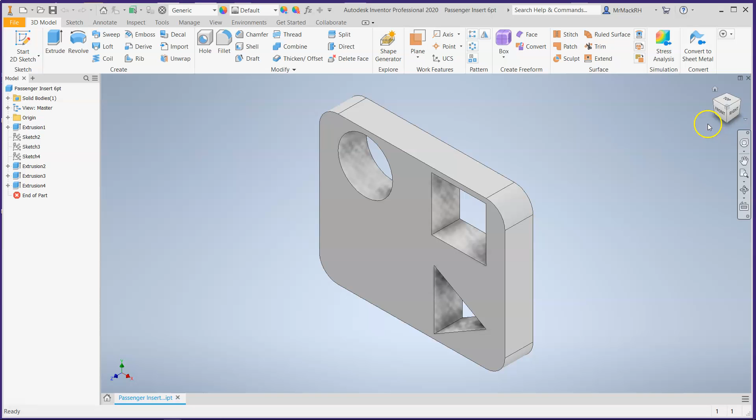So for the star shape on the passenger insert, probably the easiest thing to do is ignore the 5-point star that they have in the diagram and just create a 6-point star. That's probably the easiest. So we're going to put a new sketch and then draw our 6-point star down here. Now the easiest way to draw that 6-point star is to use two triangles.

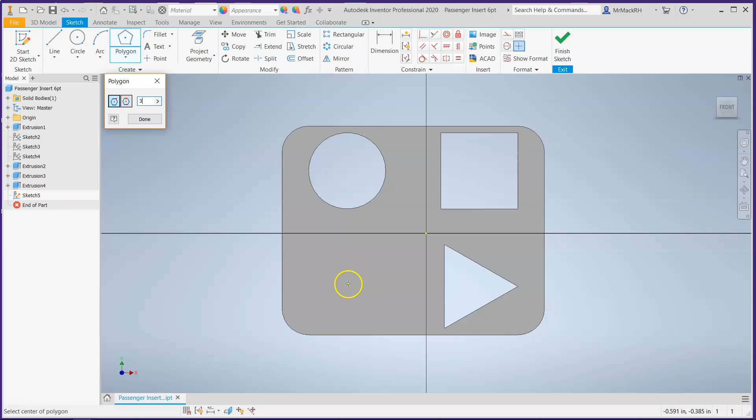So since we already have the polygon tool, set it at 3. And then we're going to find sort of the center point. This is going to be a little tricky. I can line it up in a minute. So I'll do one triangle here.

And remember, this time I'm going to use a horizontal constraint for the bottom and make it rotate horizontally like that. Then I'm going to escape, and I'm going to grab the middle of my triangle and slide it around a little bit to get in the middle of the part here. I don't want it this big, but I do want it a little bit bigger.

So we're going to dimension this side here. I'm going to go ahead and call it 0.5. That should be a good size.

And now I'm actually going to create another triangle. Click the polygon tool, should already be set at 3. I'm going to use the exact same center point, and see how I'm creating another triangle in exactly the same space, but this time I'm actually going to go to here and rotate it.

All right, now in order to make sure it's the same size, I'm going to use the equal sign, and I'm going to say that this side is equal to this side. And now it has moved it around a little bit. They're now equal. And because I'm using the same center point, here, I'll double check one thing.

I know I have this one set as horizontal. I'm going to make this one set as horizontal just to make sure it's perfectly symmetric. And it is. Hit escape again, and now let's slide it up just a little bit and over just a little bit by grabbing the center point.

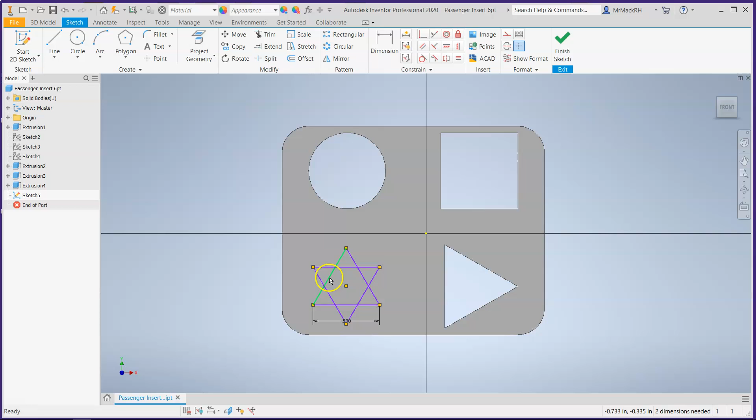So before we cut it out, though, if I tried to extrude cut this right now, it would come in pieces. So what I want to do is remove the middle lines here. So we look at the tools under Modify, and we find the Trim tool.

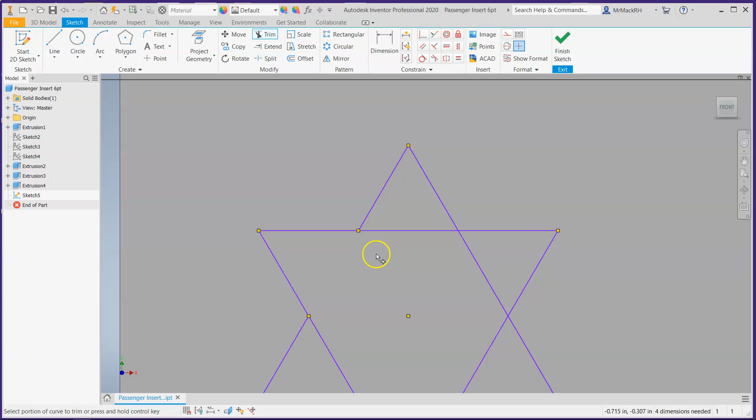So click on the Trim tool, and you'll have to zoom in close. You see how if I hover over this line, it's all green at first, and then I can tell very faintly that there's a dotted line here. That dotted line is the piece that I'm going to cut out. So I'm going to click here, here, and so on and so forth.

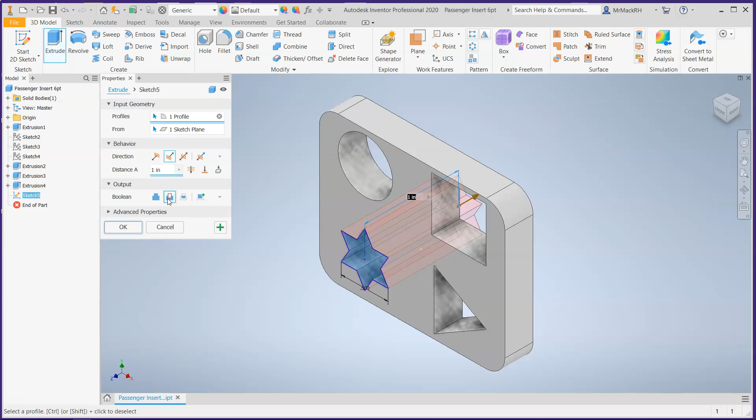And that is our 6-pointed star. So now I can finish sketch, extrude, and now reverse it to a cut. Click OK. And that is the 6-point star that you could use as a shape.

Now I'm going to go ahead and finish out with this video, and then I'll go back and make another video for a 5-point star, which is a little more complicated, but it can be kind of cool.

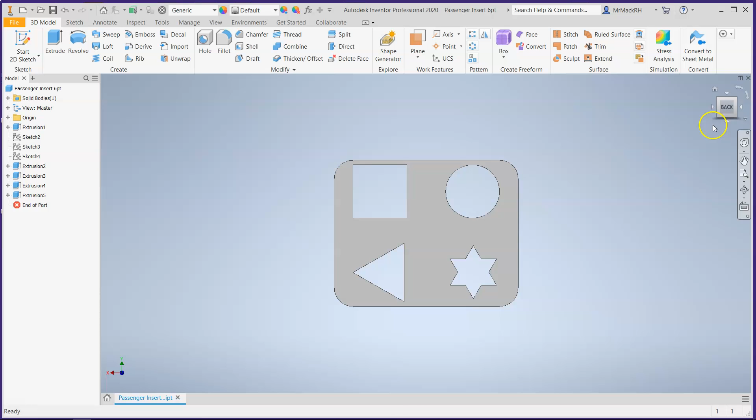So to finish this out, right now I'm looking at the front. I'm going to flip it around to the back. So what we need to understand is this piece is actually hollow. And that's what shell is. So we're going to do a shell thickness of 0.01.

I'm going to angle it back again so you can kind of see where we are. Let's do that right there. So if we look at it, here is the isometric view of the front. This is the front face. I'm going to rotate it one corner. This is the back face.

So now I'm going to use the shell tool. I look up here under Create, and then under Modify, here is the shell tool. Click on Shell. It's going to ask you some questions. First of all, do you want to remove the face that we're shelling? Yes, we do. And then what is our thickness going to be? It should be 0.01.

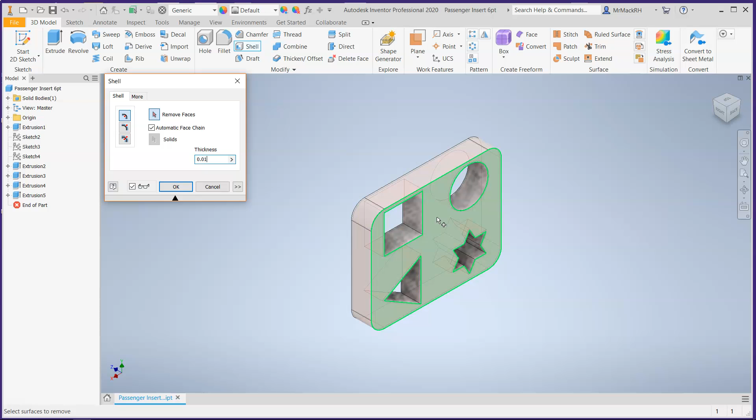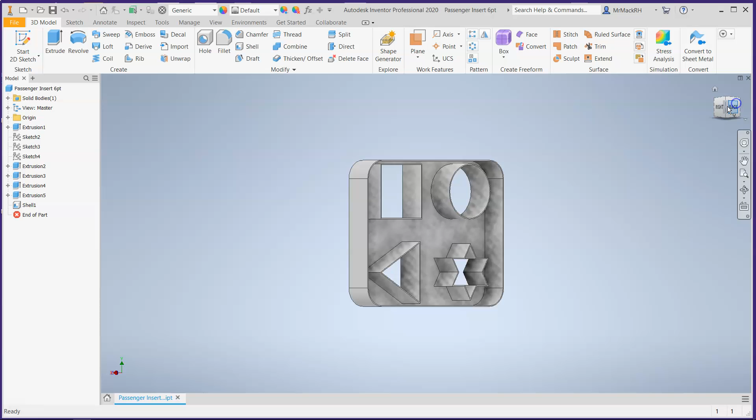And then we're going to click on the back face. Then click OK. So let's look and analyze what's happened. I had a part that looked solid, except for the cutouts. Now, upon further inspection, I have it hollowed out.

So you see what that's done? That's hollowed it out into a tray. That is called a shell.

So what does that do in the real world? Well, that saves a lot of money in plastic. So if this is being glued down anyway, does it really matter if it's a solid piece of plastic? No. So you shell it out. That saves money on plastic. It saves time on the manufacturing process. So it's something useful and convenient.

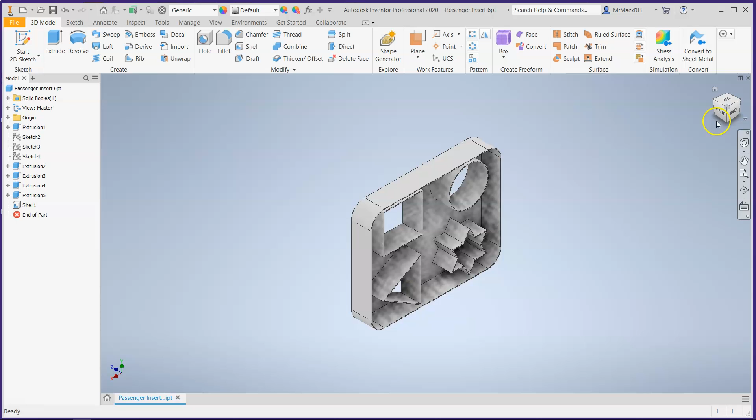You do this with sheet metal a lot. Now, you don't necessarily extrude cut the same way you do with sheet metal, but it is part of the design. So that's called a shell.

And finally, we're going to change the color. Up here at the top, well, first thing we want to do is we want to select the name of the part. I've named it Passenger Insert 6-point. So once I select the name, you'll notice it's been highlighted blue.

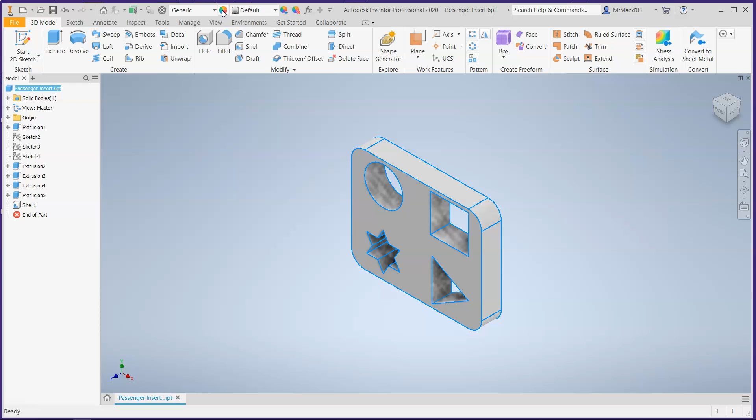Now there's some color wheels at the top. The middle color wheel. Click there. You have to double click. All right, there it is.

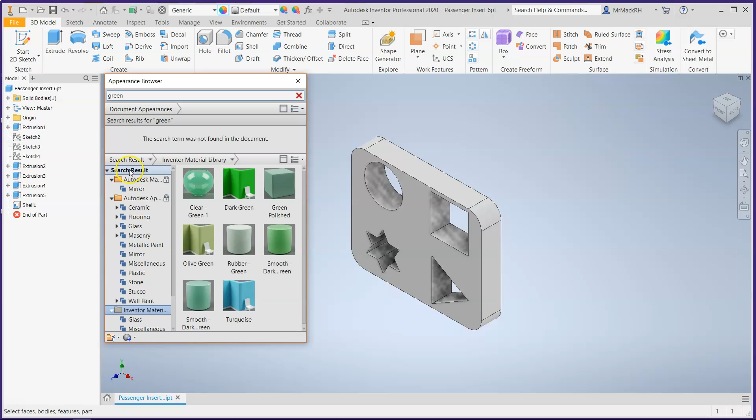So, what color do we want? We're going to search. I'm going to make it green because that's what it is in the diagram. And then it says you're looking currently in Inventor materials. So I want to make sure I'm looking in all the folders, not just the materials folder. So maybe, let's see, is there a way to search all? Yeah, so if you click on search result, then it's going to give you every green that has been labeled.

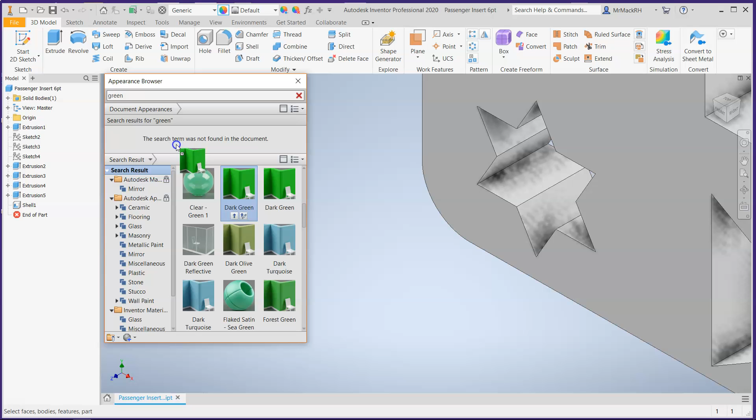Inside Inventor altogether. And basically it's this green here, the dark green as they call it, although that's pretty bright. That's the one that I think they have in the diagram or the picture. So grab that one, that picture, and drag it here where it says the search term is not found. Drag it here. And so if we select our part name, then click on our color, and it has now been applied. And now you can X out.

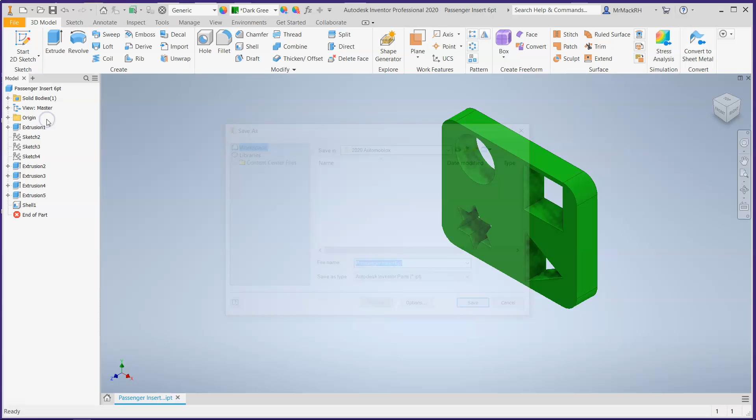Save what we have. File. Save as if you haven't named it yet. Passenger Insert 6-point or Passenger Insert and then your initials. That's fine. And then click Save. Yes, replace it. And that is it for the Passenger Insert.

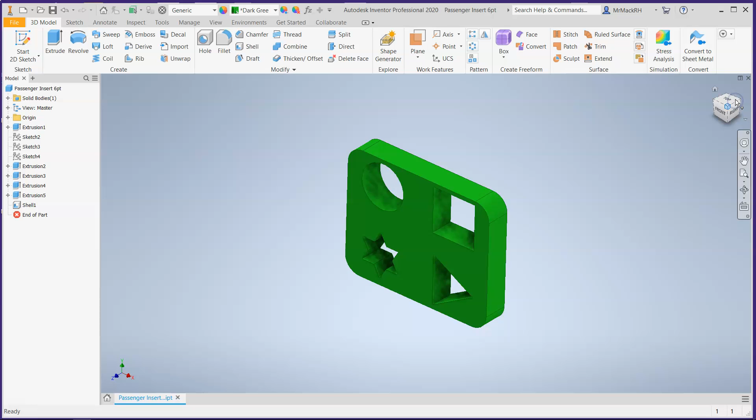Now, I will make another video to show you how to put it on a drawing sheet, because the drawing sheet is what you're going to turn into Canvas. All right, if you want to look at the 5-point star, check out that video. That's coming up next.